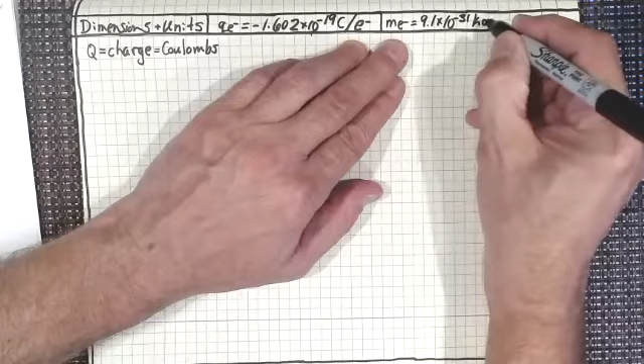In fact, you should probably know what the mass of an electron is, because an electron is your life, isn't it? Now, I remember this, and every other electrical engineer that you'll ever meet in your entire life will be able to tell you what the mass of an electron is. You're not there yet, right? You're still a couple years away from joining that club, but it is 9.1 times 10 to the minus 31 kilograms. All right? So those two things you really should know.

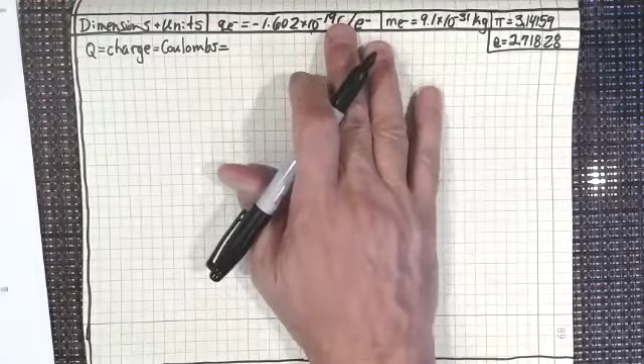You should also take away from here the fact that pi is 3.14159, and let's not forget Euler's number, and I mentioned this last time too, is 2.71828, right? So take that away with you, and you're probably way ahead of me guessing what I'm going to ask you to do next. Now let's just look at this for a second. So I know that one electron is minus 1.602 times 10 to the minus 19 coulombs, right?

So then the next question is, if I had a bucket of electrons, and inside that bucket was 1 coulomb's worth of electrons, right? We've got a bunch of electrons trying to escape here out of my electron bucket, right? So I've got a bunch of electrons. How many electrons do I have in that bucket?

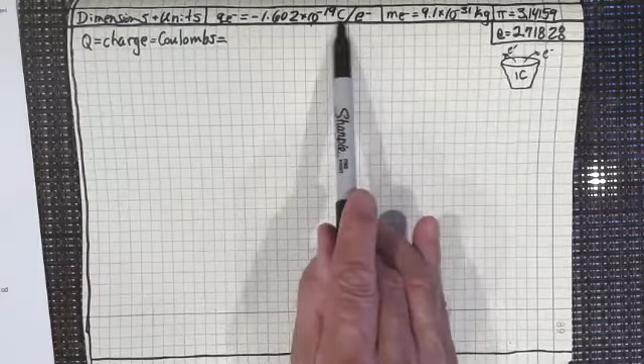Right? Think about it. How would I figure out, if I had minus 1.602 times 10 to the minus 19 coulombs per electron, how many electrons would I have in 1 coulomb? And I'm sure that you're saying, okay, his units there, coulombs per electron, if I just reciprocated that, I'd have electrons per coulomb, right? If I just took the reciprocal of 1.602 times 10 to the minus 19, I would get 6.24 times 10 to the 18 electrons per coulomb. See how I did that?

And I'm sure that many of you did exactly the same thing in your head, and you immediately knew what I was doing. Those of you who didn't, catch up. No, I'm kidding. It's not really catching up. You're going to be homogenized throughout the course of your engineering education. That's just how it works, because some people have already had some of this stuff. So in your freshman year, and even in the beginning of your sophomore year, when you're getting into your first technical courses, you may not be homogenized. There may be some people with more high school experience than other people, and they may be ahead. That's good, because sometimes you can keep that momentum going, but other times there's things that happen in your life that tend to throw you a curveball. That's right. I'm sure that some of you can intimately agree with that.

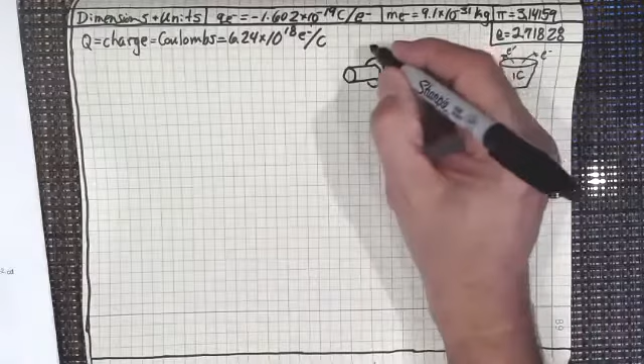So that's what you want to do. Let's just get all of this together. So that's the amount of coulombs. Now, what if I had a very short piece of wire, right? And around that wire, I had some, well, I think I'm going to have to draw this first. Let's see. There we go. I'll draw it like that. And then that goes around there. Oh my God, it's starting to actually look like a wire. Don't tell any art teacher. There you go. So let's say that I've got a piece of wire. It's about 3 inches long. From one end of the wire to the other end, it's going to be 3 inches.

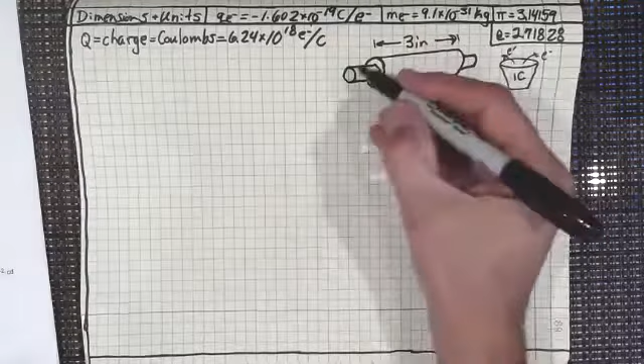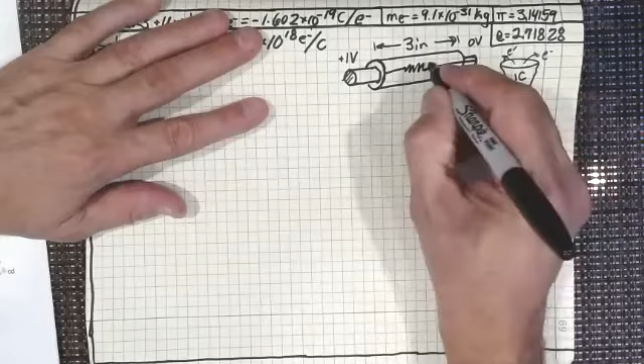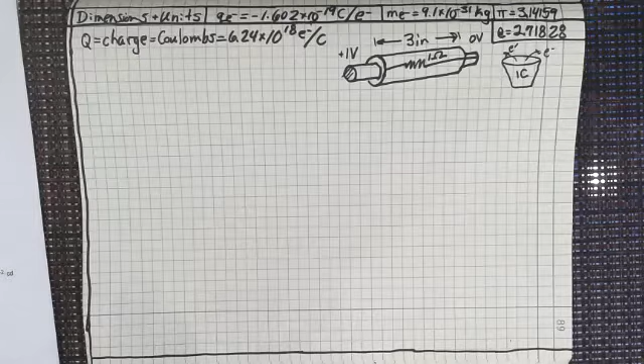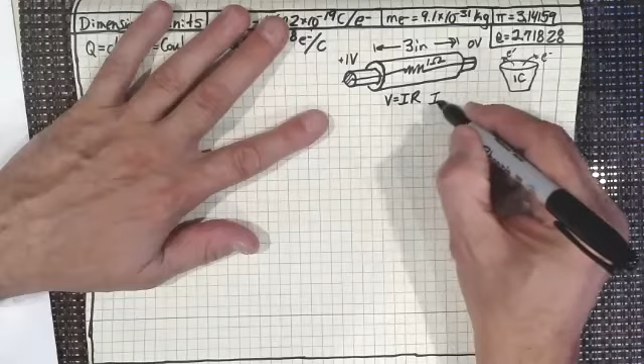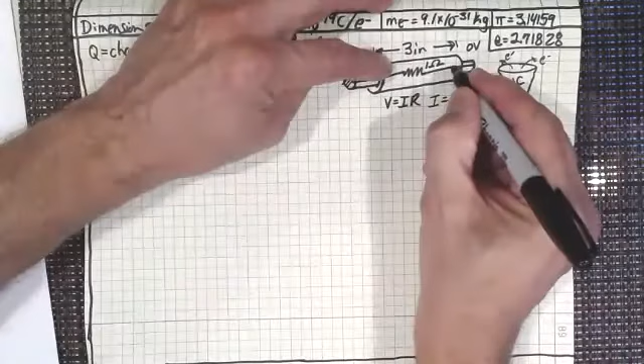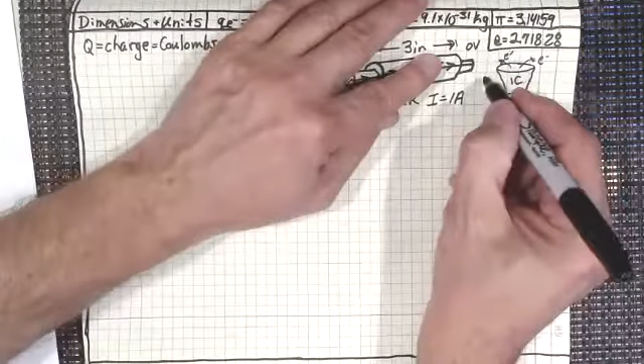Now, with Ohm's law, V equals IR, and some of you may be familiar with that from high school. Ohm's law tells us that the current flowing through that wire would be 1 amp, because I would be voltage, 1 volt, divided by R, which is 1 ohm. That would give us 1 amp. So I would have current flowing through that wire from the positive to the negative. Of course, electrons go in the opposite direction. I'm just going to point that out to you. Electrons go from negative to positive. So if we were looking at electron flow, it would be flowing in that direction. But the current, I, is flowing in the positive to negative direction.

I'm sure everybody understands that. I just thought I'd point out that electron flow, because it's a negative charge carrier, is going in the opposite direction to the current, which we've defined as going from positive to negative. And we did that because at the time that we defined current, we had no concept of charge and everything else. And of course, charge carriers are electrons. So that's quite a bit that we've got there. Now, if that's 1 amp, right?

Now 1 amp, 1 coulomb. If I have a wire, let me just draw this. If I have a wire and I have current flowing through that wire, right? My current is 1 amp of current flowing through that wire. And I flow the current through that wire for 1 second. 1 amp for 1 second. That will transmit 1 coulomb of charge.

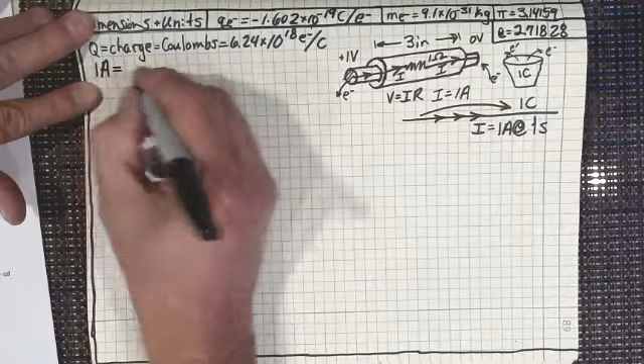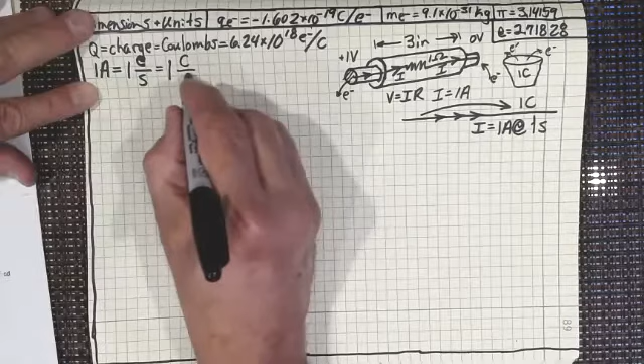1 amp flowing through a wire for 1 second transmits 1 coulomb, or 6.24 times 10 to the 18 electrons. Isn't that incredible? 6.24 times 10 to the 18 electrons transfer through a wire that's got 1 amp for 1 second. So what we can say, since we know that an amp is current, right? We can say that 1 amp equals 1 coulomb per second. That's supposed to be a C. It doesn't look like a C, does it? I'm going to write it again. 1 coulomb per second equals 1 amp.

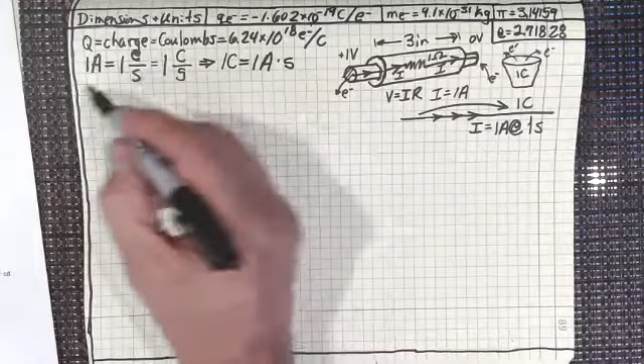Now you could say, okay, we could say that it's 1 coulomb per second, or we could say that 1 coulomb equals 1 amp second. Notice I've got the dot there. It's not amp per second. Of course it's not. Look at the algebra that we've got here. 1 coulomb equals 1 amp second, and that would mean 1 amp for 1 second gives me 1 coulomb of charge. That gives me 1 bucket, or 6.24 times 10 to the 18 electrons in 1 second. 1 coulomb. All right, does everyone understand that?

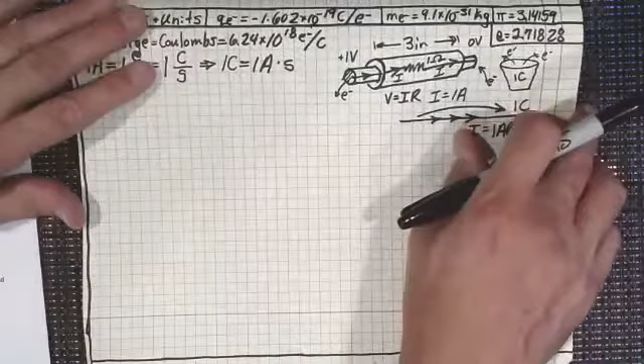Now, I want to also point out, what if I had this set up and I just threw a switch, right? How long would it take an electron that goes in one end of this 3-inch wire to get to the other end? Let's say that I colored the electron that's going in this end. I made it orange. So I stick an orange electron in one end here. How long does it take to get out the other end of a 3-inch wire? You're probably saying, oh, it's got to be the speed of light.

No. What this electron does is it goes into the crystal lattice that's in the copper. It knocks an electron out of an atom there. And then that electron hits another electron in another atom, and it knocks an electron out of there, right? And so as soon as I throw the switch, the electronic pressure, just like your shower. As soon as you turn on your shower, you don't have water from the reservoir immediately come into your house. No, you have water that's been in the piping system for 7 days. But as soon as you turn that faucet on, the water pressure pushes that water that's been in the pipes for 7 days out onto your face.

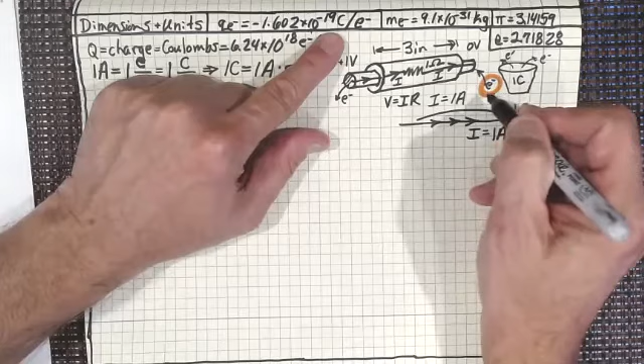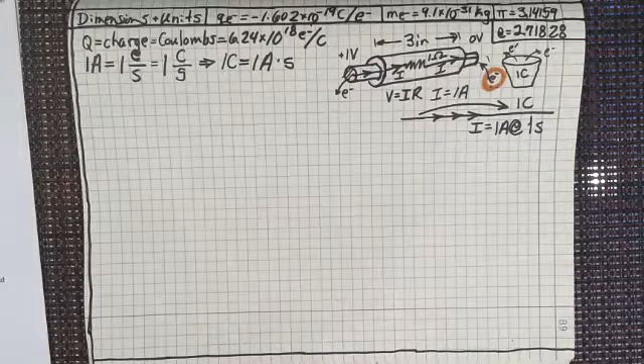But it would take about an hour for this particular orange electron that I tagged to knock other electrons free and keep moving down to actually get out the other end, right? So I'm just going to put him here. I want you to think about that. Just like in the water main system of the city, there's a lot of water in that system. When you turn the tap on, more water may flow from the water tower into the plumbing system, but the pressure in that plumbing system is immediate. In fact, it travels at the speed of sound in water, but that's pretty much instantaneous for us. The same thing's true here.

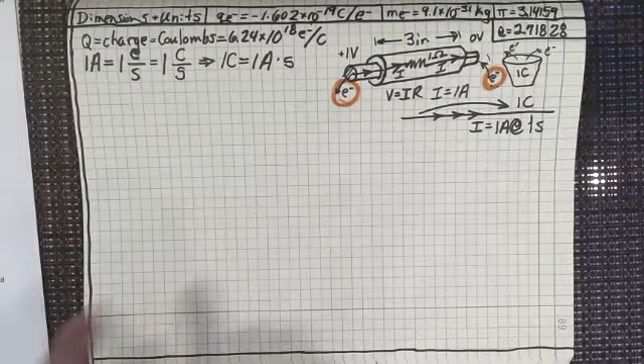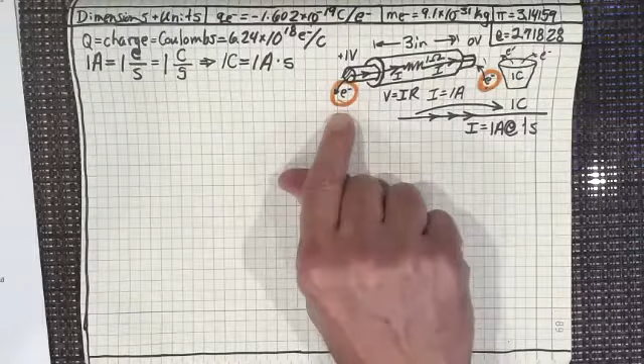As soon as I throw that switch, at 7/10 the speed of light I start getting the current flowing through here, but that one electron is going to take a long time to actually get through that wire to the other end because there are already so many electrons inside that it has to push out. I hope that I made that clear. I love to make people realize things that are counterintuitive to what they may have learned prior to this. Anyway, now that we have electronic charge out of the way, let's look at what that gives us. What is capacitance?

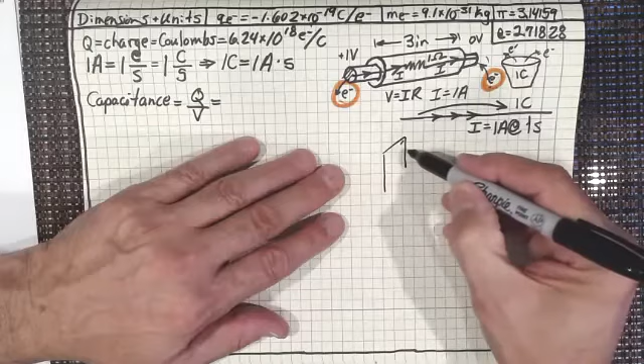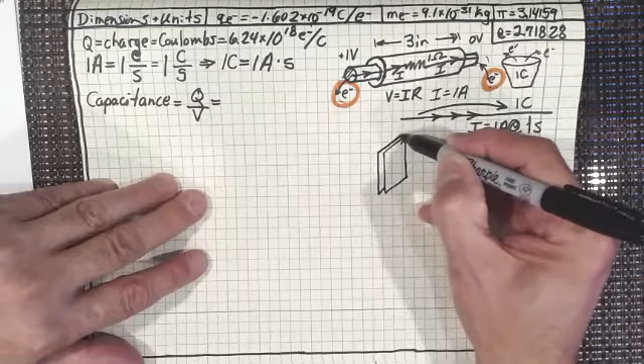Capacitance is just charge divided by voltage. Charge divided by voltage. And what really is a capacitor? I'm just gonna draw the capacitor for you, and I want to discuss a capacitor for just a second, sort of in general terms. I'm sure that some of you have had some familiarization with capacitors, maybe in high school or whatever.

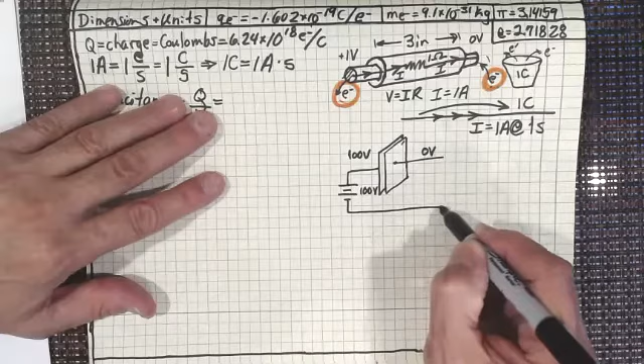So let's say that I've got about 100 volts on this side, and we'll call this side ground, right? And in fact, how would I hitch that up? I would just run this down to a battery, right? That's a 100-volt battery, and then I could run that to ground, and then everything here to here is really just a short circuit. So I've got this set up like that.

Now, what's in the middle, right? So right now, I'm really saying that this plate over here is 0 volts, right? Well, that doesn't come through too well. This plate over here is 0 volts, and the plate on the other side is 100 volts. So let's just blow that up in 2 dimensions to see what I've actually got there. It's going off this way, and that's going off this way. But what's in the middle of that? It's an insulator. Yeah, that's right.

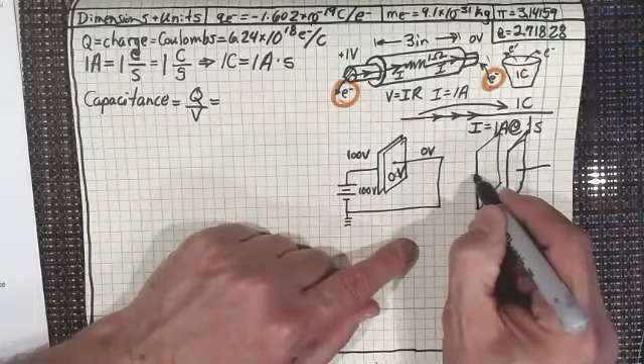Don't ever think that there is one electron that is going from one side of that capacitor plate, right? So this is a charged plate, and this has a charged plate over here. They both have equal and opposite charges on those 2 plates, just like I've drawn there. But what's in the middle of those two plates? They never touch. In a capacitor, the plates never touch. I want to point that out.

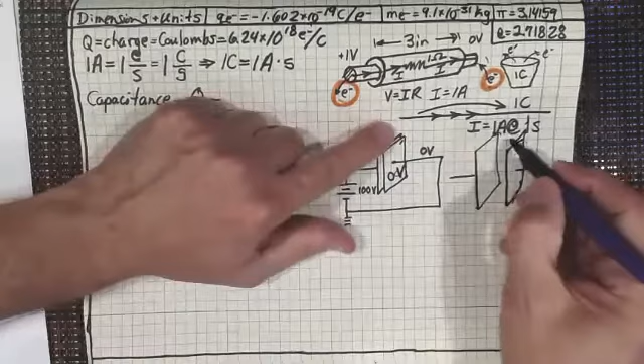I hope this works, oh no, of course it doesn't, because they all hate me, all of these pens. What do I got here? Oh, that's brown. Oh yeah, we'll use brown.

Yep, barium strontium titanate, which is brown, actually. I know that because I ripped these apart. So I've got barium strontium titanate, which is a fantastic dielectric and is an insulator in the middle of this capacitor now. And I'm charging the two plates. Now, what happens to the current?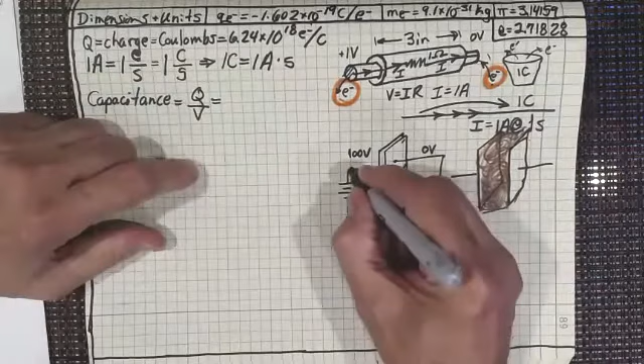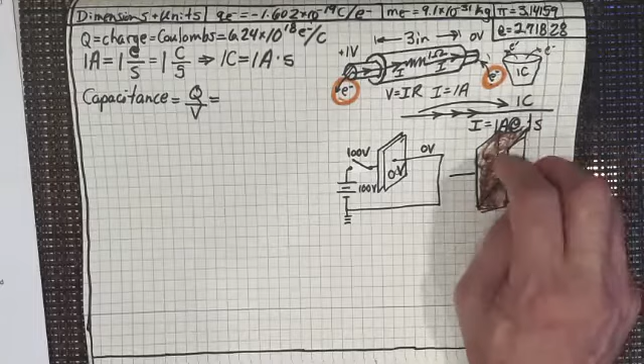Let's say that instead of having this all connected, I actually have a switch. I'm just going to put a little switch in here, and I can throw that switch. Now, the capacitor is uncharged to begin with, so I don't have any positive charges here, any negative charges here, right? In fact, the dielectric itself is unpolarized, and that's what happens to the dielectric inside. It starts to get polarized where its negative charges go to one side and its positive charges go to the other side.

So when I throw that switch, and I'm going to put a plus on here just to let everybody know that that's a positive. Now, what attracts to the positive? Isn't it the negative? Once I throw that switch, in the beginning it's going to take a little while, but aren't the negative charges going to start to align over here? So I'm getting more and more negative charges over here.

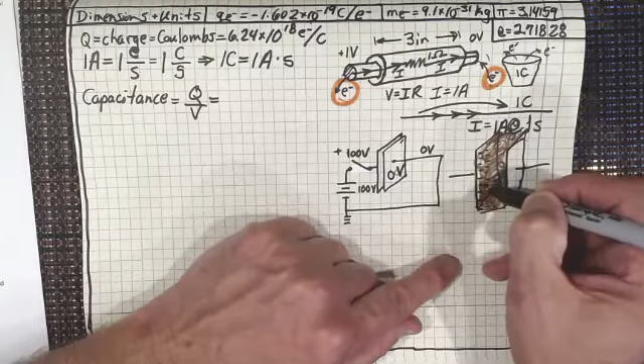Hey, what's going on at the other end? Because this is the negative over here. In fact, instead of making that 0, why don't I make it negative 100 volts so that it really sticks in your mind. So I've got minus 100 volts on the other side connected to this thing right here.

So I've got minus. And what's that going to attract in the dielectric? That's going to attract a lot of positive charges in the dielectric to line up here, right? So there's never an electron that ever transfers through a capacitor. Now, the next thing I want to ask is, once I throw this thing, is there going to be current flow?

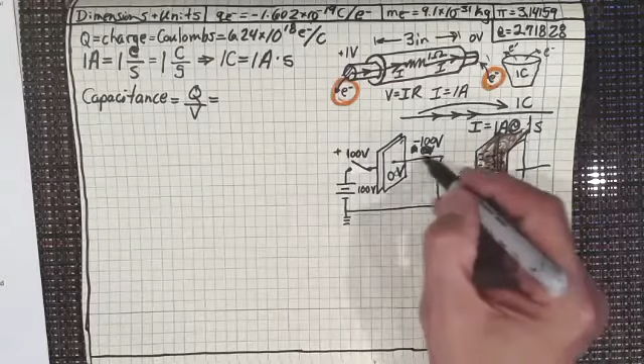Oh, you know there is. Oh, yes, absolutely. The charges in here are going to start to move in that direction. So as soon as I throw it, we're going to have these charges lining up, and for them lining up, that's going to change what the polarity is in the things right here, in the electrons within the wires. So the electrons within the wires, well, that's positive, right? So what's going to happen?

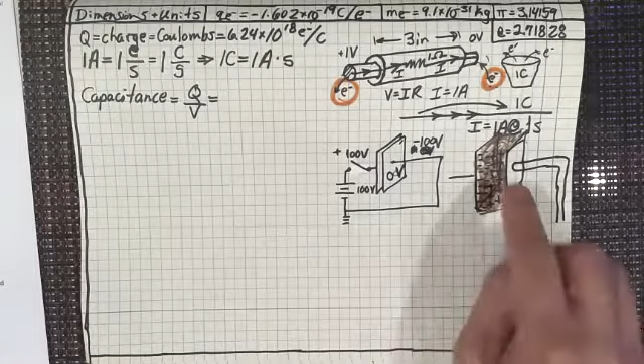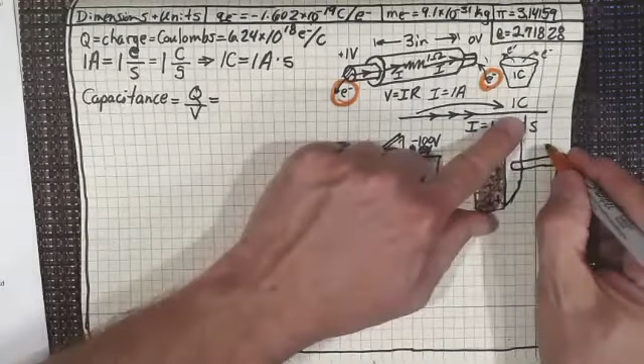The electron that's in the wire here, let's make the wire a little bit larger and make it look like a pipe. Because isn't it really a pipe for electrons? So now on the plate here, the plate is going to be positive. And where are the electrons going to go, right? Aren't the electrons going to be attracted to the positive side of the capacitor?

See what I'm trying to do for you here? I'm trying to teach you.

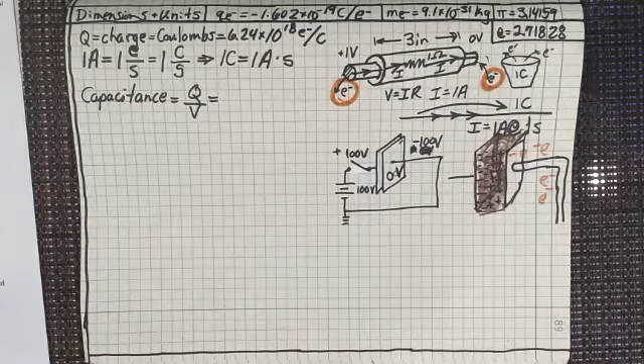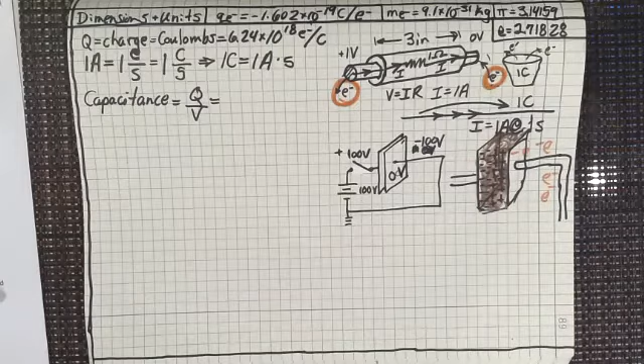Now, how about the electrons in the wire over on this side? I'm using the wrong color there. So I've got another wire over here on the other side. How about the electrons in that wire? Aren't they going to be pushed away from this? And they're going to start to go in this direction? So we've got electrons that are flowing in that direction, electrons that are flowing away from this negative polarity that we've got here, and they're flowing in that direction.

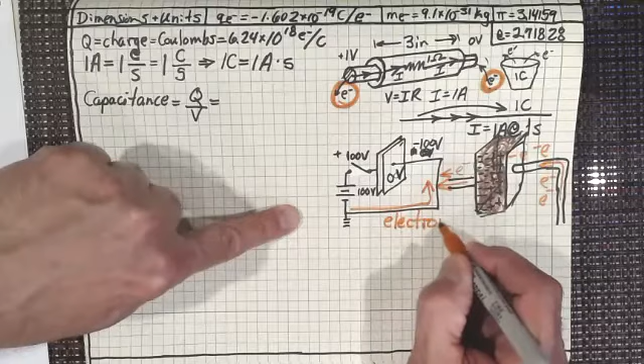So we've got the electrons flowing in this direction, right? That's my electron flow. I hope you're getting all this down. You're getting a fantastic lecture.

Where's my other color that I've got here? Do I have a purple? Oh, the purple never worked, did it? I got a couple browns. Oh, let's see what this color is.

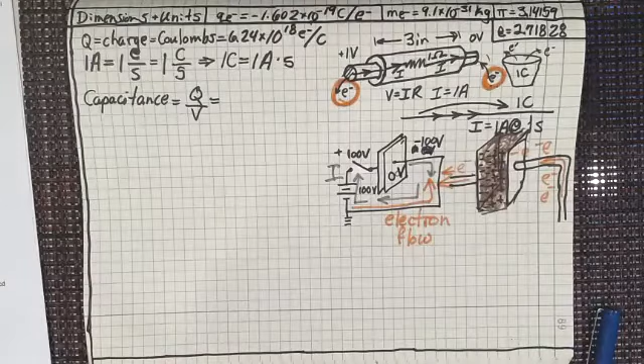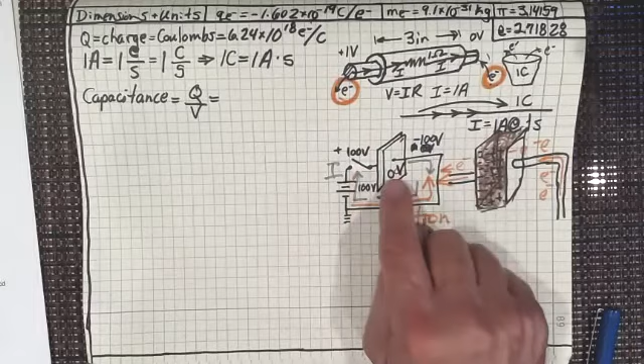It's black. Okay, and then the current is going in this direction, sort of a gray, right? So my current is going in that direction, and the electrons are going in the opposite direction. So as soon as I throw that switch, even though I've got a capacitor in here, I still get current flow. Oh yeah, as soon as I throw that switch, the capacitor acts like it's not even there for the first instant, the first millisecond, the first microsecond. It acts like I've got no capacitor there, and I've got a short-circuited wire right across that capacitor.

I thought I'd just throw that in. We're getting a little off track. Let's get back to capacitance. So, charge. We know that charge is a coulomb, and we know that that is an amp second. And what's voltage? We know that voltage is a kilogram meter squared per seconds cubed amp, right?

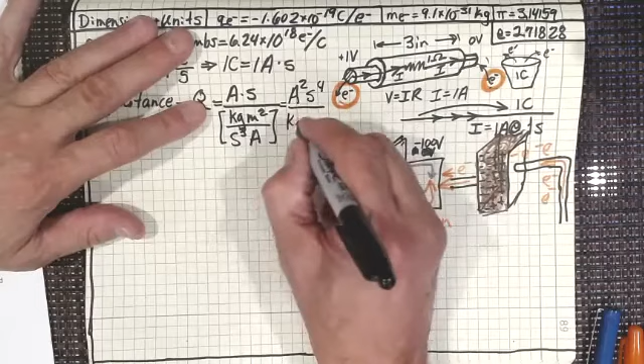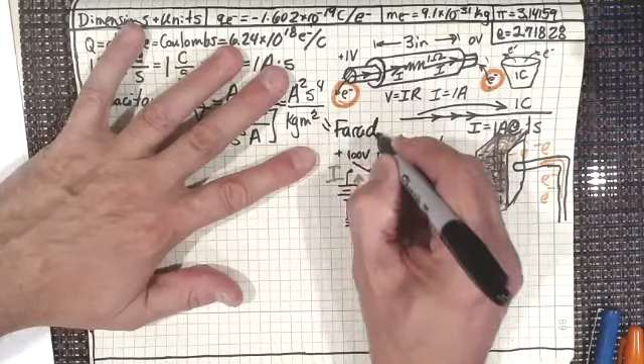Well, let's just simplify that in our heads, because you're engineering students and sophomores, and you know what you can do. And you know that we've already taken the numerator times the reciprocal of the denominator, so we get an amp squared seconds to the fourth over a kilogram meter squared. And what do we call that? We call that a farad, after Michael Faraday, the great British scientist and experimenter. And so that's capacitance.

Just a second. Where is that? I thought somebody was at my front door, but I guess not.

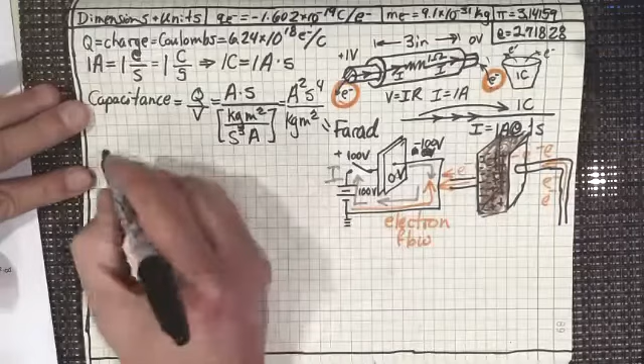Anyway, so that's a farad, and that's capacitance. And so what I want to do next is I want to talk a little bit about magnetic fields. But I also want to catch up on a couple things. Before we do that, let's look at pressure.

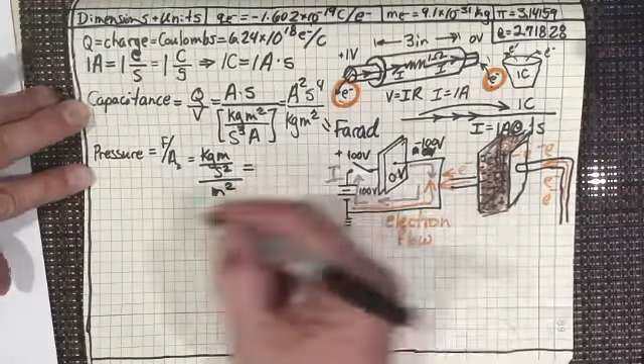You know, pressure, if we define an equation, it's really force per cross-sectional area, isn't it? Force per cross-sectional area. Well, we know that force is a kilogram meter per second squared, and we know cross-sectional area is meters squared. Sorry about that. I was thinking of the next unit that I'm doing while I'm doing this one.

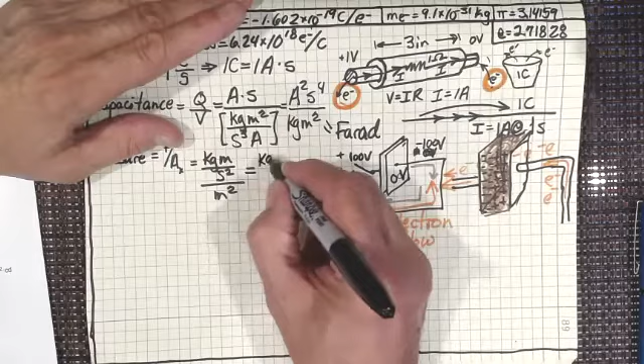Getting a little bit ahead of myself, so let's just, if we multiply the numerator by the reciprocal of the denominator, what we end up getting is a kilogram per meter second squared. And we actually have a nickname for that unit. It's called the pascal, and we usually write it as Pa for pascals.

Yeah, I've never really seen just the P all by itself. I suppose that would represent something else. I don't know. But we use Pa for pascal. Might as well write it out there.

I actually named my son Pascal, but not the same Pascal. It actually is Paschal, after the patron saint of Paris.

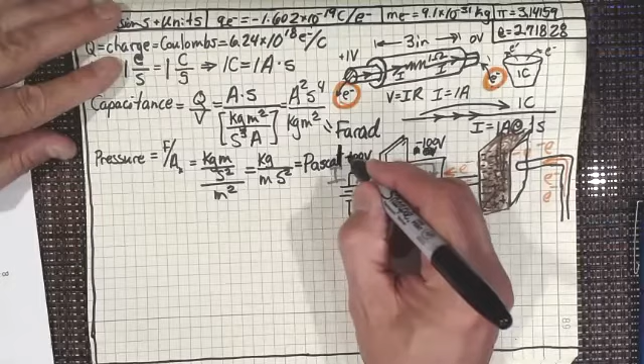And I don't know why that says T. Oh yeah, that's because that was a negative, wasn't it? Okay, so that's a pascal.

Now, when I say pressure, this could also represent stress, because if we looked at, let's say, a tensile specimen, a piece of steel or a piece of aluminum, and we were pulling on that aluminum with a force, let's say that we've got something like 10,000 newtons that we're pulling on it with, and then we look at the cross-sectional area of that, we can actually do the same thing.

We could say that stress, and we usually use sigma for stress. Stress is equal to the force in that solid piece of steel divided by the cross-sectional area. When we're looking at pressure, we're usually looking at a fluid or a gas. I really should say fluid because that includes both a liquid and a gas. So we're looking at a fluid that's pushing on a cross-sectional area, like the water on the bottom of a dam gateway.

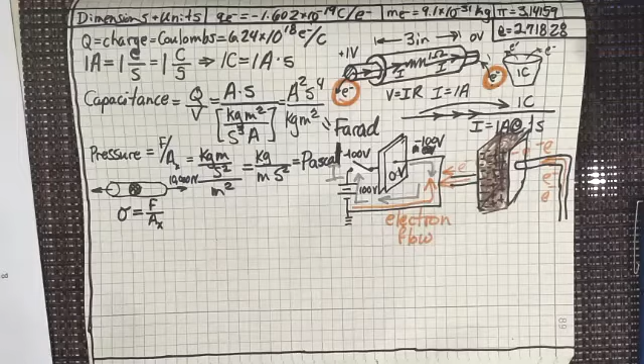And when we're looking at this, we're looking at what the tensile forces are inside of a piece of steel. I'll just write steel over this. This is more the solid mechanics, whereas pressure is more for fluid mechanics. And so we get the same thing here. We get pascals. Now, what is a pascal really? A pascal is really energy per volume.

And that's why I named my son Pascal, because he's really energy per unit volume. Yes, I know. Don't be the son of an engineering professor. There's the moral of that story. Although my son loves his name, and his nickname is Pass, and he's a great soccer player, so that's all good.

All right, so energy then is kilogram meters squared over seconds squared. And then volume is meters cubed. You see what I'm really doing here? I'm just teaching you how to use these. All throughout your life, you're going to be doing this with units.

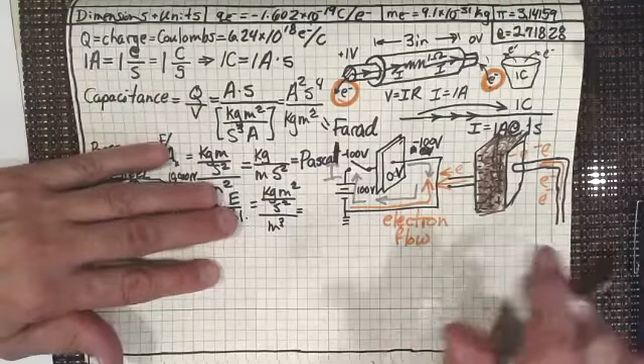You're going, I think the heat that's coming out of that cup has to do with the thickness of the cup. And someone's going to say, no, it doesn't matter how thick the ceramic of that cup is. Heat comes out just as fast. You go, no, I think the thickness of the cup is slowing it down. If I make that cup twice as thick, it'll be half as fast. And of course, I'm talking about the conversation that the people had that actually figured out what heat transfer was all about. So let's go back to this now.

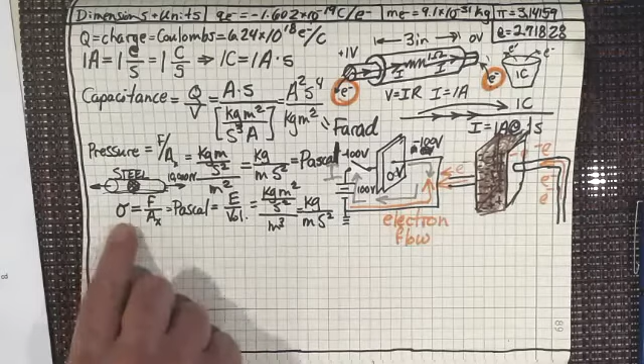Now this is cubed, and we get the same thing, kilogram per meter second squared. So yes, energy per unit volume is the same as pressure, is the same as stress in solid mechanics, is the same as pressure in fluid mechanics. They're all the same. It's energy per unit volume. All right, so I got that out of the way.

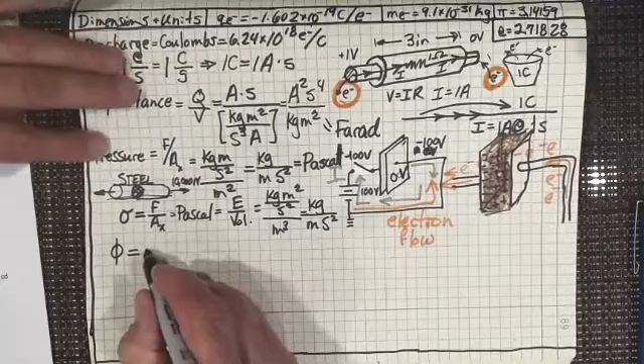The next thing that I wanted to look at is flux. Now, before I do that, I just want to have a discussion. Why don't I have that discussion of flux in the next one? I'm going to continue presenting these. So magnetic flux is, let's say, voltage times time. I just want to get this out.

We'll have a much longer discussion of what magnetic flux is later, but just to talk about the dimension and the units of magnetic flux, we've got voltage, which is kilogram meters squared per seconds cubed amps, times time, which is just a second. So that gives us kilogram meters squared over seconds squared amps. Now, what do we call a kilogram meters squared over second squared amps? We call that a weber.

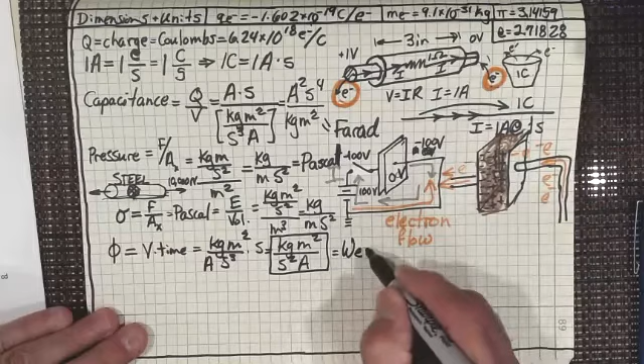Yep, it's named after a barbecue grill that we use. No, of course it's not. But that is what we do.

And what am I talking about here? I'm talking about magnetic flux.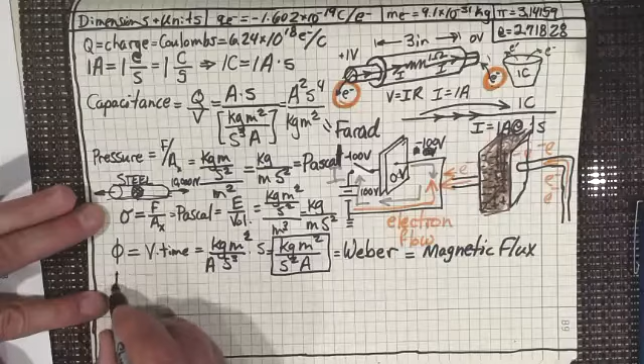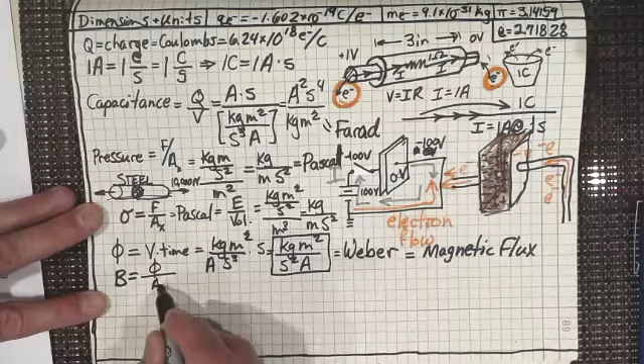And we'll have a much more in-depth discussion of magnetic flux, I shouldn't say at the end, about the middle of the lecture series, all right? Now, the next thing I want to look at is something that you're more familiar with, and that's magnetic flux density. And what that is, is magnetic flux per cross-sectional area, right? We want to know the amount of magnetic flux that's flowing through things.

Let's say that I had a bar magnet right here, right? And this is the south end, and this is the north end. Well, I have flux that's going to be flowing out of the north end into the south end. I'll just put some arrows here as to the direction it's going, right? So we've got flux that's flowing out.

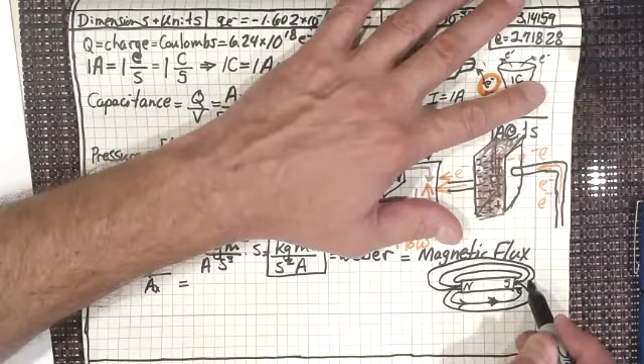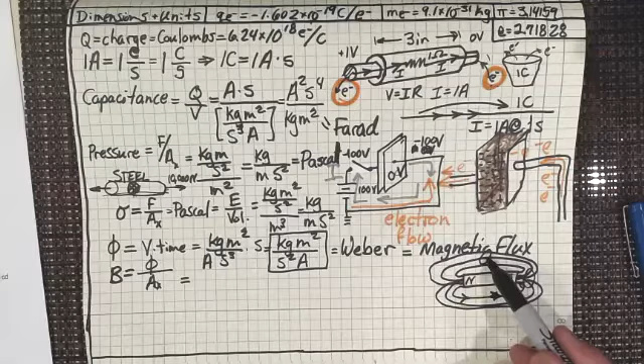And I think that everybody can see that if I was to take a cross section right here, I'm going to have a lot more flux lines going through it than if I take the same size cross section out here, right? So I'd have a lot of flux density here, and I'd have a little flux density here. And that's what magnetic flux density really tells us: where the magnetism is really intense. Where is the magnetic strength the greatest? And of course, it's the greatest right here, not out here in the middle of the flux lines.

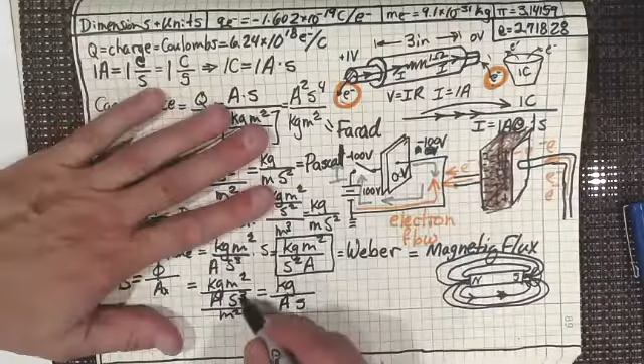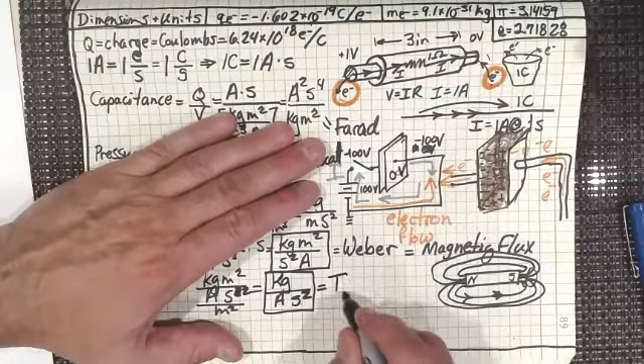So when you look at that, it'd be over the meter squared. So this would be kilogram meters squared over amp seconds squared divided by meters squared. I think everybody can see that that gives you a kilogram per amp seconds cubed. Oh, did I say cubed? I'm sorry, I meant seconds squared, amp seconds squared. So there we go. So kilogram per amp second squared. And we have a name for that too. In fact, that is something that we use even more often because we talk about the magnetic field at the surface of the Earth, and this would be a Tesla, right?

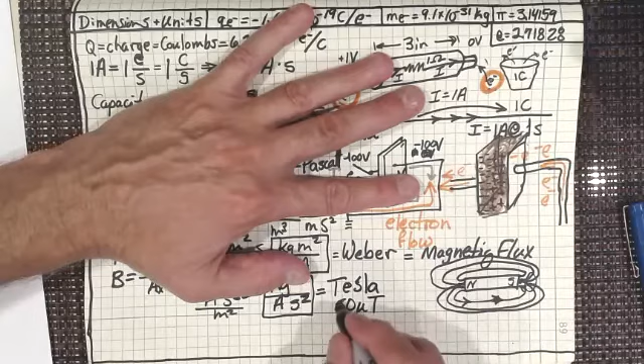Now, what is the magnetic field at the surface of the Earth? The magnetic field at the surface of the Earth is about 50 microtesla. That should be a 5. Boy, that doesn't look like a good 5, does it? 50 microtesla is the terrestrial magnetic field of the Earth. And we talk about the magnetic field of the Earth in flux density terms, not in flux terms. I don't know what the overall flux of the entire magnetic field of the Earth is. It's got to be quite substantial, I'm sure. I'm sure somebody at NASA does know the answer to that, but I don't.

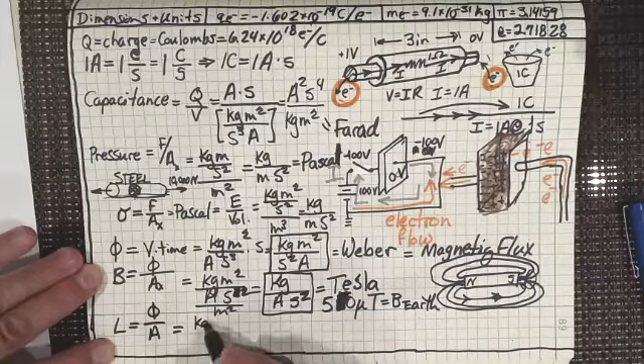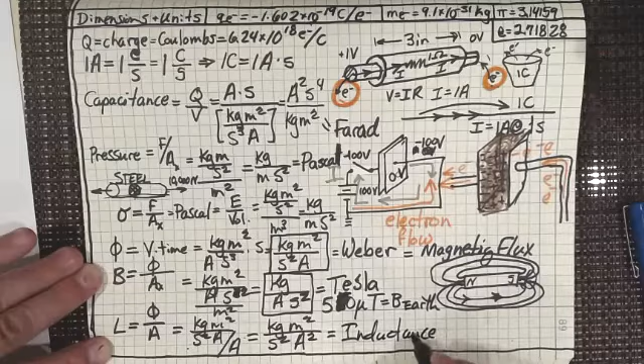The last one that I really want to look at is inductance. And inductance is really flux per amp, right? Flux per amp. And so if we do the math there, kilogram meters squared over seconds squared amps, and we divide that by an amp, right? That's going to give us a kilogram meters squared over seconds squared amp squared. And we have a name for that. That's the unit of inductance, or the dimension of inductance. And the unit of inductance, of course, is a Henry.

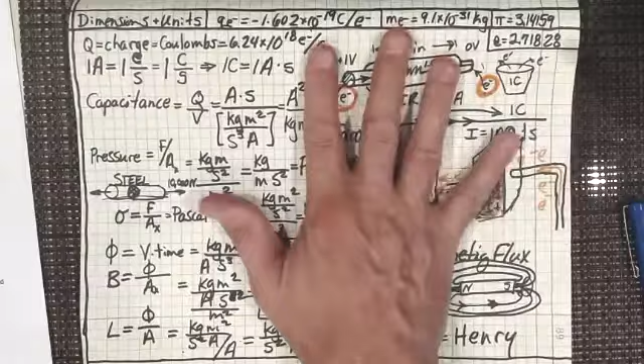Yep. And so that ends the dimensions and units part of the course. I could get into so many other things, and we're going to definitely talk more about capacitors and inductors, how inductors store energy, how capacitors store energy, all throughout the Network Theory 1 course. In the mechanics course, we're going to be concentrating more on this, which is the steel and the pressure and all of those things. However, all of this is important for your general understanding of engineering, dimensions, and units.

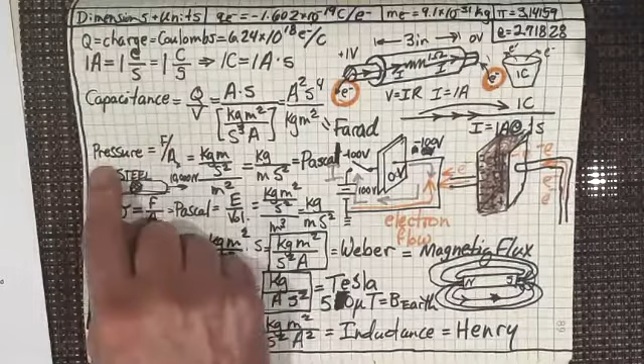And you also will be working with other engineers from other disciplines too, and you'll want to understand pressure. Don't say, oh, I don't want to understand pressure because I'm an electrical engineer. No, you want to understand the units of pressure. All of these things intertwine all the time. So focus on that. All right. I'm going to end this lecture here now. This is our third and final lecture on dimensions. Then we're going to start getting into the meat of the course.